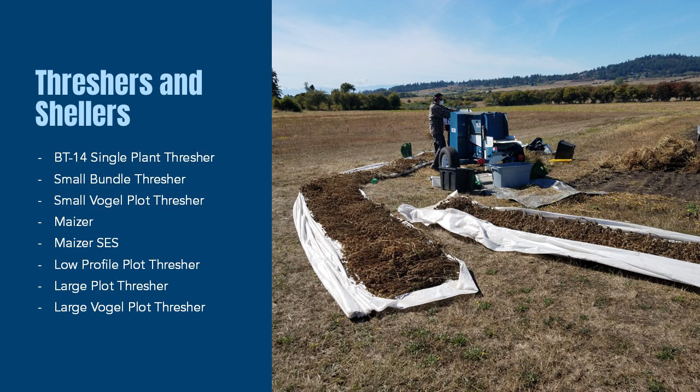And so, like I said, we're going to kind of cover everything at a higher level. There is a fair amount of information to get through, and we want to make sure that we have time for questions at the end. And so what you see on the screen is just a list of all of the threshers and shellers that we offer at ALMACO. We'll go through each one individually, we'll give some information on each one, and do encourage questions at the end. That's what we're here for.

So the first one we're going to start out with is the belt thresher, what we call the BT14. This particular thresher is designed for basically podded plants, some cereal grains. You think of podded plants like soybeans, edible beans. We have a lot of people using them in wheat and also hemp. So some of the characteristics of this machine is that it was originally designed for soybean breeding work. And so by using two belts, it's very gentle on the seed as it's threshed.

We have several combinations of belts to basically optimize the threshing of the machine. It's very easy to feed, and there's literally no carryover from plant to plant, or if you have a small bundle of plants that you're running through it. So as I mentioned before, we use this machine a lot with soybeans, edible beans, wheat, small grains, peas, millet, and probably the most common machine we sell for like hemp breeding purposes.

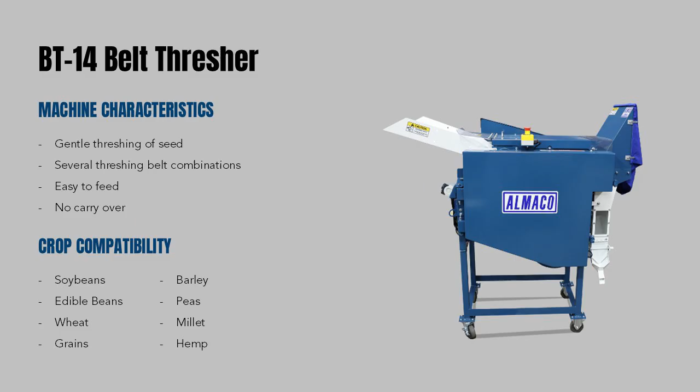The machine itself, you can get with your choice of an electric 3/4 horsepower motor that's either in 110, 220, or for overseas 220, 50 hertz. It also comes with your choice, or you could get it with a 3.5 horse gas engine. The stand types available are going to be a stationary stand or a stand with casters, which is what's pictured. And then we also have a version where it's on an axle and a wheel truck assembly where you can tow it to the field with like an ATV or a UTV. It's not meant for highway speeds, but it can be towed with a vehicle.

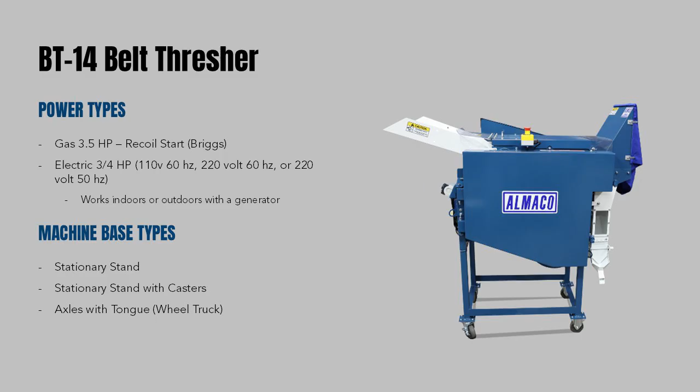For the threshing belts, we have multiple belt styles available, and over the years, we've kind of developed a guide that says, this is what the best combination of belts is for a particular crop. And so you look at like the upper or lower mini cleat lock, that's what we would use in soybeans or edible beans, chevron pattern, smooth, any combination of the belts. And some examples we have listed below. And so the belt combinations required is going to be determined by the crop or crops that you're going to be threshing.

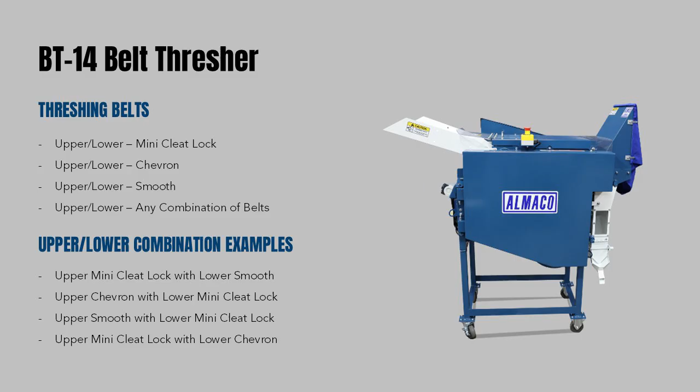So on the cleaning system, basically we use a winnowing blower. You'll find that on pretty much all of our threshers, there is a winnowing blower of some sort to clean the seed after it's threshed. It's easily adjustable. You don't have to open up guards or anything of that nature, so you can adjust it while the machine is running.

And for this particular model, we use what we call a squirrel cage fan, which is similar to what we use on our SPC combines and things of that nature. So the seed, once it's threshed, is gonna go into a seed chute, which in this picture is on the lower right-hand side; it's the white chute with the plexiglass window for viewing. There's a light in there, so you can see what's inside of it without having to open up the back and look. And it also comes standard with what's called the seed chute extension, or the envelope extension.

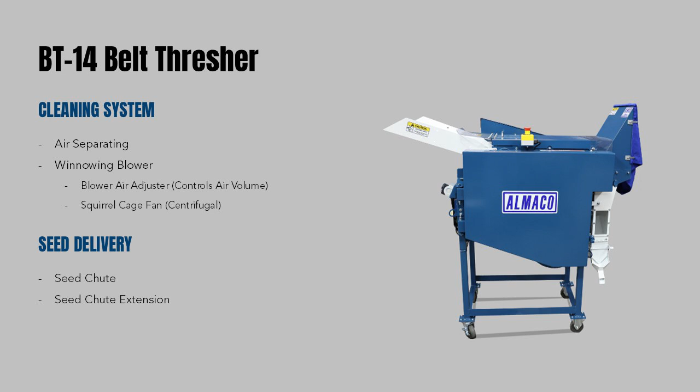So the belt thresher is one of those that can be used in a shop or a lab, or you can take it to the field. One thing to note if you're going to be outside with it, whether in the field or outside of a shop, and it holds true for all threshers, is you want to make sure that the prevailing wind direction is the same as the winnowing air, or the exit of the machine is away from the wind.

So in general, you're gonna position the machine on level ground, and start it with the push button or with the pull rope on the gas engine, depending on what you have. You'll feed the crop into the feed chute and the belts will take the material from that feed chute and thresh it. In the beginning is when you wanna adjust your winnowing air so that you're not blowing seed out the back, and you're also getting a clean sample. Belt clearance can be adjusted at that time too.

We do have recommendations for distances and clearances in the manuals, but it's always best to run a couple test plants through, and then, once everything is threshed for that particular plot, you would collect the sample out of the seed chute.

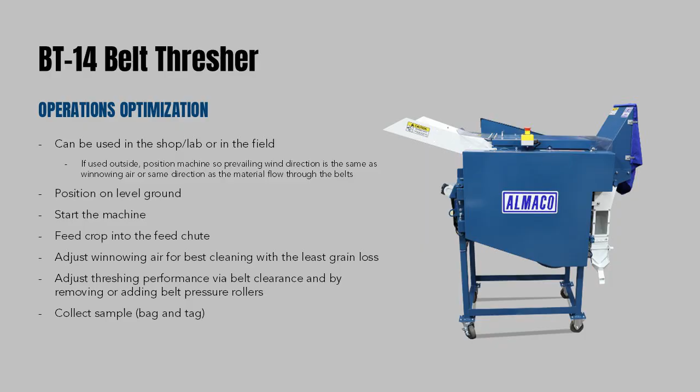So we're gonna move on to the small bundle thresher, or what we call the SBT. This particular machine uses an overshot style cylinder and concave. It's very easy to inspect for clean out. There's no carryover; there's no way for anything to hang up on the inside of the machine. It's got a large opening on the top, which is where the material gets fed in. And there are 5 different styles of threshing cylinder and concaves that are all fully interchangeable.

So if you're using the machine for multi-crops, say soybeans and sorghum, and then maybe you've got some wheat samples where you would require a different cylinder, it really is easy to change. It takes about 15 minutes roughly to swap them out between cylinders.

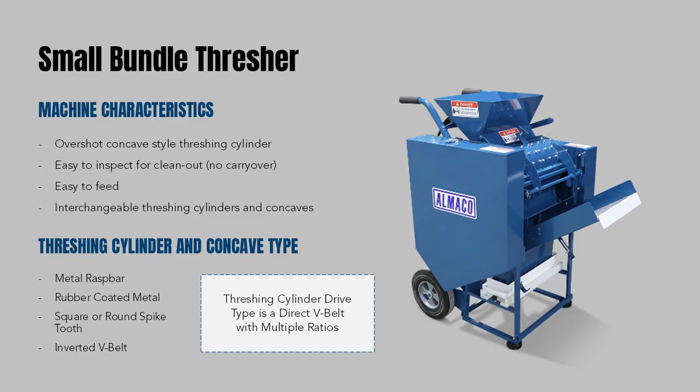With this particular model, you can get it with roughly 4 different power types: a Honda gas engine that's 4 horsepower, a 3.5 horsepower Briggs & Stratton, or electric in 110 or 220, either 50 or 60 hertz.

One of the things about our smaller threshers, like this SBT or even the BT14, is that if you had the electric motor on it and wanted to take it to the field, you could easily put it on a trailer and run it off of a generator, which gives you a little more flexibility. So you can run them outside in the field in the summer or fall, and then indoors in the winter.

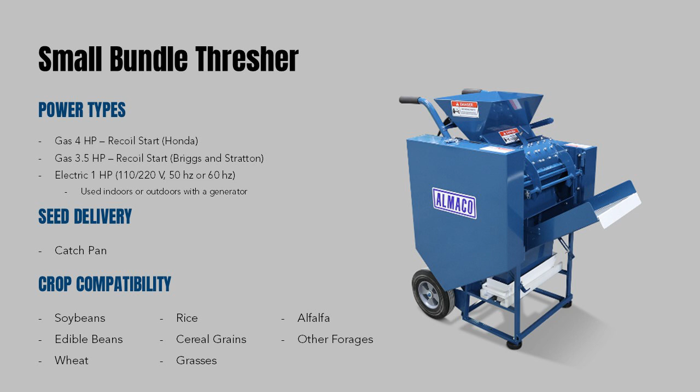Pretty basic as far as the seed delivery goes. It just has a seed catch pan. And you can pretty much thresh any crop that's out there, minus corn. The threshing cylinder combination is going to be determined by what crop or crops.

So the cleaning system is pretty straightforward. As you feed the material in, the threshing cylinder is gonna thresh the seed out of the pods or off the heads. There's a little small straw puller that's gonna pull the seed and some of the chaff material through, and then it's gonna fall through an airstream, a winnowing blower. You'll hear the word winnowing blower a lot because we use it on pretty much every machine for that style of seed cleaning.

You can fully control the amount of air that the seed falls through. This one, as far as the blower fan itself, is something that we manufacture. It's not a squirrel cage like on the belt thresher. You can change the direction that the air hits the recleaning pan, which is what's called the winnowing pan. And then each machine comes with four different, what we call recleaning screens.

So if you have seed that gets kind of blown out towards the back and it falls on the screen, that way it'll fall through that particular hole size, whichever hole size you have in at the time. And then that seed gets pushed back down into the seed collection pan. We also have on this particular model what we call the screen adjuster, where the airflow is going through the seed stream. It's actually a screen that keeps foreign material from getting back into the blower, which makes it so that you have a clean, even airstream.

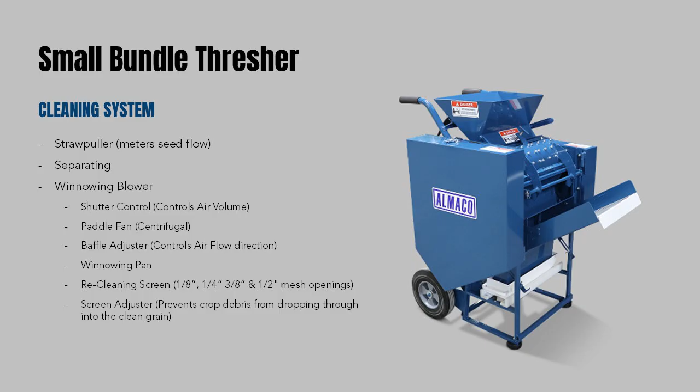For this one on the operation, again, you can use it in shop or lab or in the field. You want to make sure it's level. Same with the wind direction. You want the winnowing blower blowing in the opposite direction, or same as the wind direction. When you start the machine, the drives are going to engage, and you're going to feed the crop into the cylinder.

Now, one thing about this particular machine is that when you're feeding your plant material in, you're not going to let the whole stem and everything go all the way through the machine. You put the plant material in with the heads, you let the threshing cylinder pull the pods and the seed off, and then you pull the stems back out. And so it's something that's different because of the size of it. You really can't have all that stem material going through it. It'll just clog the machine up.

And again, at this point, you'd want to adjust your winnowing air so that you're getting a nice clean sample, but yet you're not blowing seed out the back. And then for collecting the sample, the seed tray basically just slides out and then you can dump it into a bag or a bucket or whatever your preferred method is.

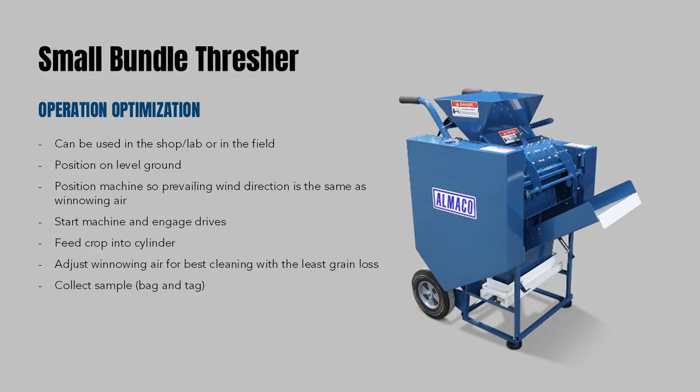So the next one is another small thresher. It's called the small Vogel plot thresher, which we call the SVPT. This particular model is really meant for single heads or a single plant. We have a lot of customers that use this in single plant cereal grains, and sorghum and some soybeans and edible beans, but it's really pretty small and it does work if you have the pods already, say, bucked off the plant. And it's pretty straightforward.

It's very similar to the SBT. It's just got a small straw puller that's going to pull the material down after it's threshed and help with some separation. This particular thresher you can get as it's pictured on a caster stand, or you can get it on a wooden base with a steerable assembly, which if you think about it, looks like a Radio Flyer wagon base, similar to that.

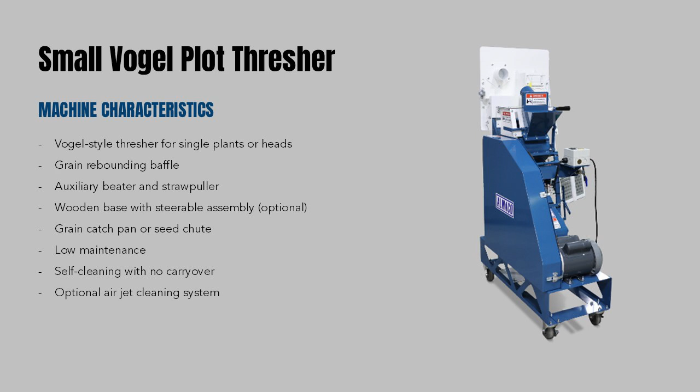This one you can get for grain collection, you can do the catch pan or a seed chute. And the seed chute would then direct seed, say, to an air delivery if it was part of a seed processing line. This one, like pretty much all of our machines, is self-cleaning with no carryover. And it also has an optional air jet cleaning system, where the air jets are built into both sides of the threshing cylinder, the straw puller area, and down towards the winnowing fan. And that's for clean out. You hook an air hose to it to automatically clean the inside of the machine at the end of each sample.

So with this one, the motor options are very similar. You can get the 110 or 220 volt electric, or you can get it with a gas engine, but that's only available on the wheel truck version. So if you wanted that, you'd have to have the Radio Flyer wagon wheel assembly version of it.

So with this one, we have the same style and type of concaves that we do for the small bundle thresher. I will note that even though they're the same style and type, they don't interchange with the small bundle thresher, because that one's a 12 or 13-inch wide cylinder and this one's only 6. So it's just the same style and a smaller version. And the crop compatibility is going to be the same as the small bundle thresher: cereal grains, beans, grasses, pretty much anything small that's single plant, single head.

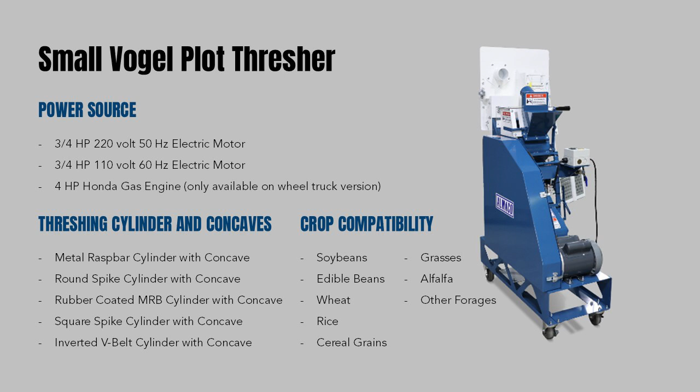For this particular model, it's gonna be very, very similar to the small bundle thresher. You can use it in the shop or lab or in the field. You wanna make sure it's level. Position it with the wind direction, the same as the winnowing air. Again, you're gonna start the machine, engage the drives, and then when you feed this crop into the cylinder, it's gonna be the same, where you just feed the heads down into it and then pull the stems back out.

Now, what I have seen in the past with some customers, instead of using the stem, say like you leave 12 inches of stem on some wheat heads, I've had customers where they just clip the wheat heads off and just run the heads through it in general. That way you don't have to worry about it. But sometimes it doesn't thresh as nice if you don't have a stem on it. So I always recommend to leave at least a foot worth of stem below the heads. That way you have something to hang on to, and it keeps your hands away from the threshing cylinder and concave.

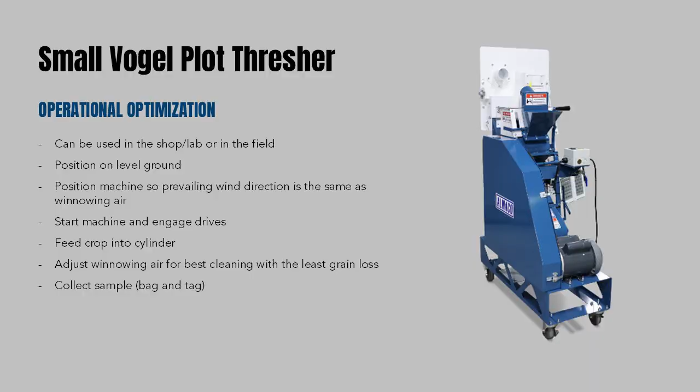Okay, so we're gonna move on to the large towable threshers that ALMACO has available. The first one is what we call the large plot thresher, or the LPT. This is gonna be a large, or high volume thresher. You're gonna have a little platform to stand on, so you're gonna be up off the ground, but it's that way for a reason, so you can feed more material through it.

The concaves and threshing cylinders on this particular machine are interchangeable as well. And one thing to note is that we use a torsion axle, and you can tow this at full highway speeds, and you don't even really know it's behind you. At 70 or 75 miles an hour, it pulls really nice.

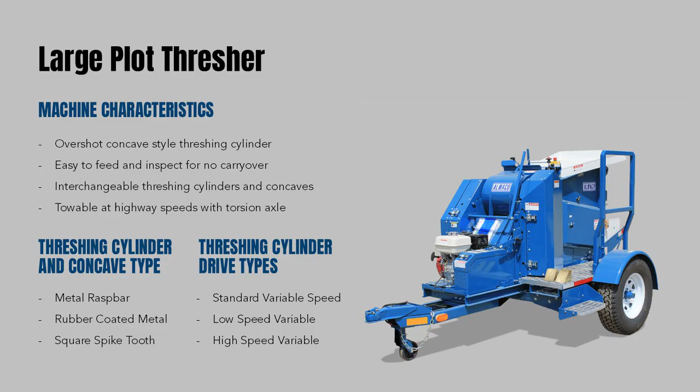So this particular model, you can get it with an 8 horse Honda gas engine with electric start, a 5 horse electric, 220 volt, either 50 or 60 hertz, or a diesel, which is a 9 horse Hatz with electric start. And we do have the option to do dual powered with diesel and electric. So if you are going to be using the machine several months out of the year, part of it in the field, part of it in the shop, you have that ability. And this machine is pretty much compatible with all crops, as listed. Basically everything except for corn.

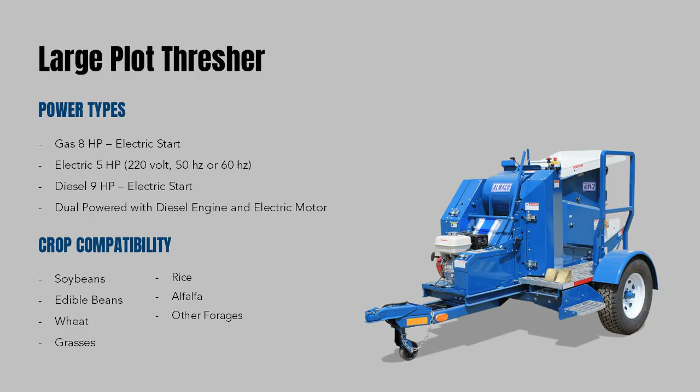So as far as the cleaning systems, the way the machine works is once the material is in, in this case you throw the whole bundle of material through the machine, it gets threshed off. There's a straw puller that kind of helps pull the material through the threshing cylinder. And then it falls onto a shaker pan, and then the seed at that point is separated from the chaff.

And then as it's being shaken out the back, the seed falls through that airstream, the winnowing blower, which is basically, you have three different ways of adjusting that air. One is the amount of volume going through it that the seed falls through. You can deflect the air onto the windage tray to help with even further cleaning. And at that point, the adjustable windage tray in the back is another option to just give that final seed clean.

The machine itself uses a single Graepel style sieve, and as you can see on the screen, we have multiple sizes available. And the sieve that would be required is all going to be determined by what crop or crops you're going to be threshing with it.

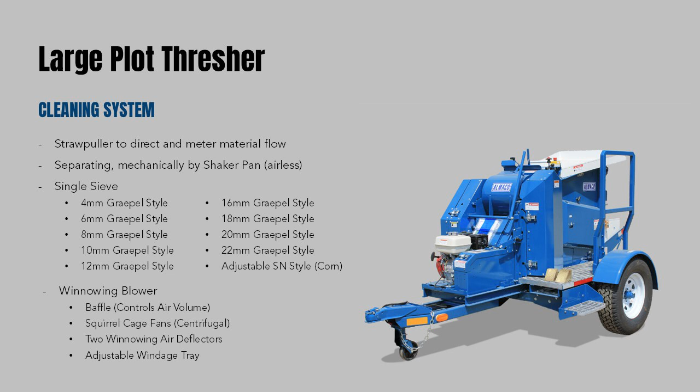So for seed delivery, the standard is going to be a seed chute where you would just put some sort of collection bucket, some sort of seed catch bucket, either something that we make, or a 5 gallon bucket or 2 gallon bucket, whatever you want to catch it in, or a tray.

We do have an optional, what we call the air delivery system, which basically has a cyclone blower on it. As the seed is cleaned and it falls into what would be the seed chute, now it falls into an air delivery tube, and the cyclone would be positioned right by the operator station. So the operator could, in theory, feed everything into the threshing cylinder and then collect the sample without getting off of the machine.

So some other common options that we have on it, I mentioned the seed catch bucket. We also can include an air compressor that's on board. It's belt driven and it has a tank and a hose. So if we're doing a lot of threshing out in the field, in between certain plots, you could use that air compressor to blow the machine out, clean it out, during your inspection.

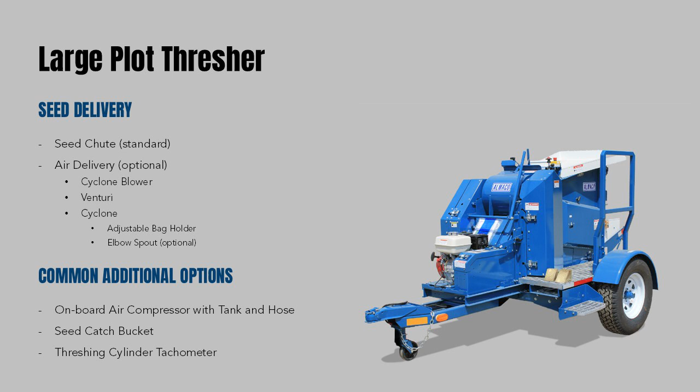And then we also have a threshing cylinder tachometer option, which if you're doing multiple crops, it really is beneficial, so that if you're threshing soybeans, you gotta be at, say, somewhere around 400 RPMs, but if you're threshing wheat, you gotta be at 1200. So it's just the easy way to know how fast the cylinder's turning.

So for the operation of this particular machine, you're gonna tow to the field. It's best to uncouple it from the tow vehicle, because you will potentially have to make adjustments. You may not be level. And the key with this machine is making sure that it's level when you're in the field. Same with the other machines, make sure that the prevailing wind direction is going the same direction as the winnowing air. And then you use the jack to level it.

And you may also use that jack to help control the time that the crop is on the sieve. So if it's on there too long, and it's just not coming out, then you'd raise it up a little bit. If your material's coming out too fast and you got a lot of seeds coming out the back, then you'd lower it a little bit. It's just some fine adjustment.

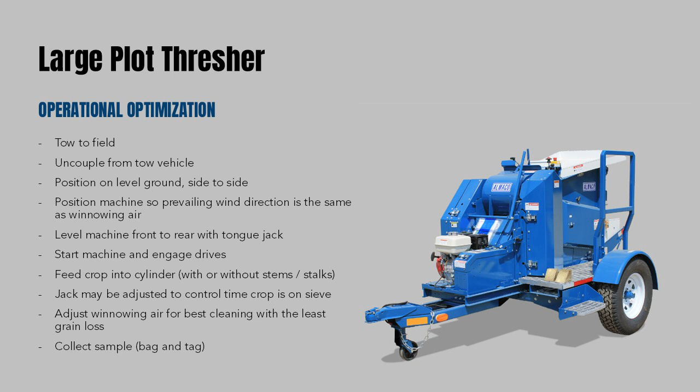And at this point, once you have it all leveled, then you're gonna start the machine, which will engage the drives. You can feed the crop into that cylinder with or without the stems. I would say that 99% of people are just throwing a big bundle of material in it and letting the machine do the work. That's what it's designed for. And again, the first couple samples you run through is when you'd want to adjust your winnowing air for the best cleaning.

So the next one we're going to talk about is the low profile plot thresher, or what we call the LPR. This is another large volume machine, but it has a lower feeding height compared to the others.

So the main differences between the LPR and, say, the LPT is that this particular model has what we call a conventional threshing cylinder and concaves. So it's an underslung concave, very similar to a commercial combine. It's the same style, and basically you adjust the concave with a lever, just like you would on a combine. And so it also has a lower feeding height with no operator platform required, and that's a big thing, I would say, for somebody like myself.

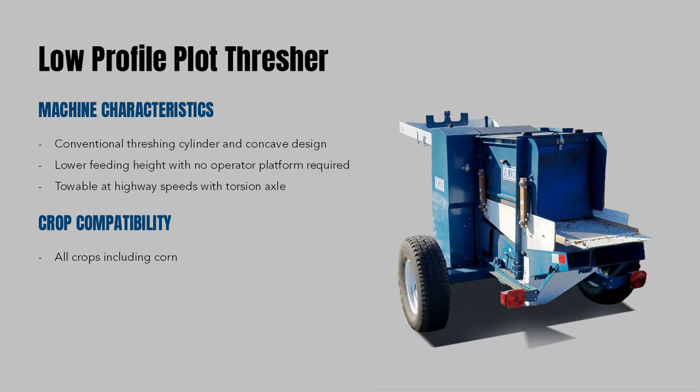The feeding height is less than 5 foot, and I'm all of 5'4", and I have no problem reaching the feed area safely. This one is towable at highway speeds as well. And for this one, the crop compatibility is all crops, including corn. And so this is probably the most versatile large plot thresher we have, because it can be used for everything.

For the power types, you can get the 8 horsepower Honda gas engine, 5 horse electric 220, or a diesel that's 9 horsepower. And again, the difference between this and the LPT is that on the dual power, you can get it with diesel or gas and electric. And so there's one of the differences there.

To feed the material, the standard is going to be the feed pan, where you just manually feed material into the machine. The threshing cylinder will take it and do the work. And then we do have a belt feed option, which is a small conveyor that feeds material in the machine. You have to feed the material to the conveyor, but once it's in that little conveyor, the machine does the rest. You don't have to worry about helping it feed through. You don't have to have your hands down by the threshing cylinder and things of that nature. So we sell a handful of those a year with the belt feed option.

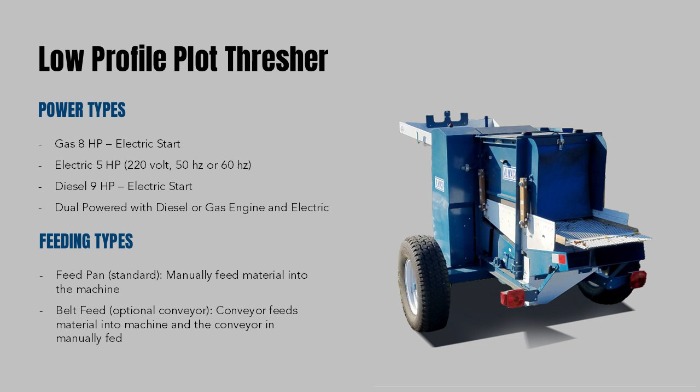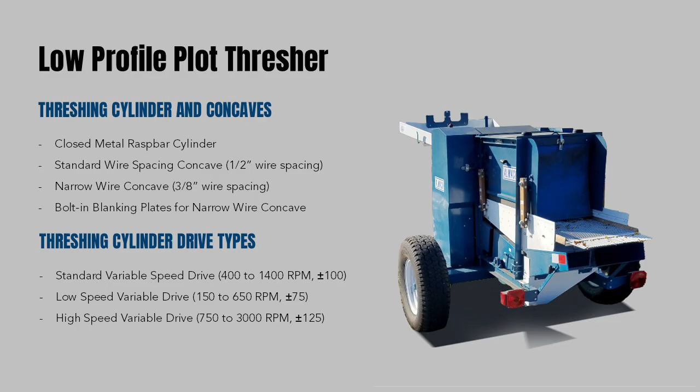So on this particular machine, we only have one style of threshing cylinder, and it's going to be a fully enclosed metal rasp bar cylinder. There are two different options for the concave. The standard wire spacing is going to be 1/2 inch between wires, which is what I would say if you're doing row crops, so corn, soybeans, edible beans, you would need the larger wire spacing. The narrow wire would be more for if you're using it for cereal grains or grasses. And then we also have some bolt-in blanking plates that help with threshing on the narrow wire concaves. This machine will have the same style of threshing cylinder drive types, where you have the standard, a low speed, and a high speed.

For the cleaning system, it's going to be very similar to the LPT, where it has the straw puller, and that's basically going to direct and meter the material flow into the machine. We're still separating it with a shaker pan. And the winnowing blower is being controlled exactly the same as the LPT, where we have the baffle control, and we use a squirrel cage fan, and we also use a single sieve on this machine. And there are a lot of components that are, what I would say, interchangeable between the two. So if you had a location that maybe had an LPR and one location had an LPT, or you had one of each at the same location, you could buy multiple sieves and they would work in both machines.

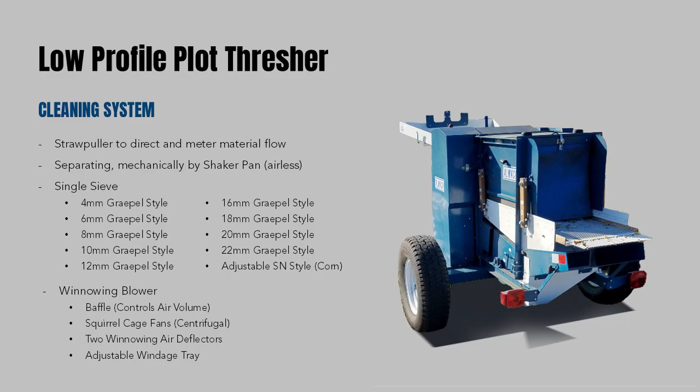And this is gonna have the same seed delivery types as the other machine we looked at. The seed chute is the standard. The air delivery is an option. This time, instead of being up on the platform, it's gonna be accessible from the ground. It's at about waist height where the envelope holder is, or the bag holder.

And the options are gonna be very, very similar with the LPR, where you can have your option to get an air compressor, the catch bucket, the cylinder tack, special feed pan guarding. And we have new options now within the last 6 months for interlock guard switches, and an e-stop on the cylinder with a brake.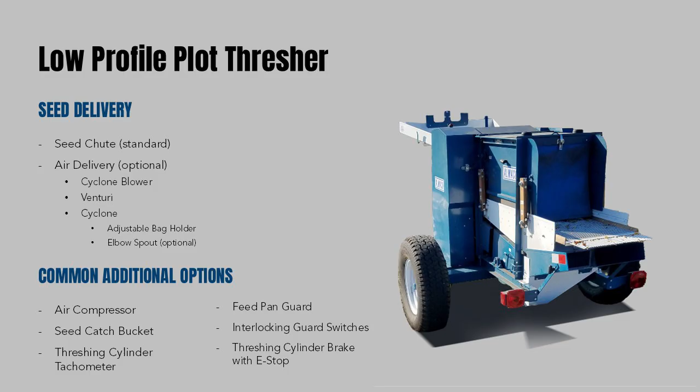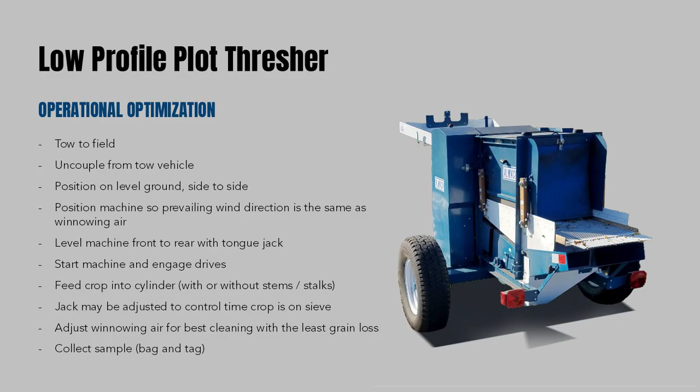So the operation in the field is gonna be very, very similar, or exactly the same really, as the LPT. Once you get to the field, you get it unhooked and get it leveled, and then you can physically start using the machine.

So the last large thresher that we have available is going to be what we call the large Vogel plot thresher, which we call the LVPT. This particular machine is going to use an overshot style concave and threshing cylinder. It's going to be real easy to feed. There is no way for carryover on the inside. It's all completely smooth. And again, it's towable at highway speeds.

The threshing cylinder types for this particular model are going to be a rubber rasp bar cylinder and concave, and then we have a forged spike tooth cylinder, and then that same cylinder with an e-stop brake. This machine, I would say, is the most common machine that is sold for all cereal grains and rice. We have some people using them in soybeans and stuff, but I would say 99% of our customers are using this machine when it comes to cereal grains.

It was based off the original Vogel design that came out of Washington State in the 60s. And so we've obviously improved it over the years. And at the current time, ALMACO is the only company that builds this machine anymore. We're the only one that can provide it, I guess.

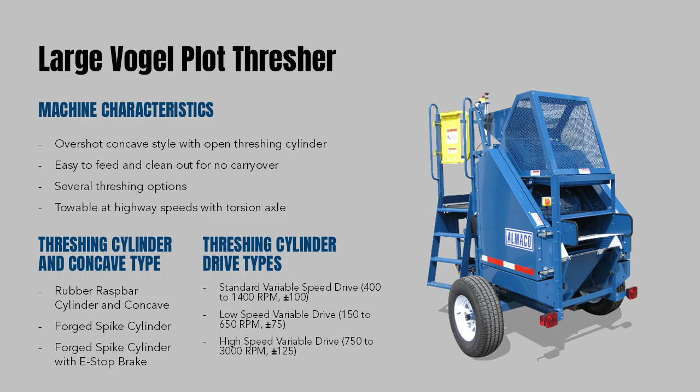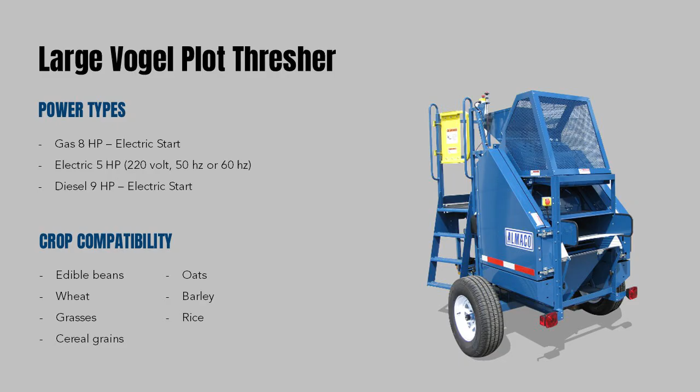So this one for the cleaning system, it basically just has the straw puller. Once it comes out of the cylinder, it's just a large straw puller that pulls everything down onto the shaker pan. But this one has a little bit different style of winnowing blower, where it's a paddle version that we make. And so the air adjustment is going to be the same, where you have an intake air shutter, and that's going to basically regulate how much airflow is coming out the back. And then we use a deflector to change the angle of the air for cleaning, along with the windage pan in the back to help with that additional fine tuning.

Right now for seed delivery, the seed chute is the only option we have for it. So there's no air delivery. If somebody wanted an air delivery, we could probably put one on it, but it would take some engineering resources and things of that nature, but it could be done. And then the additional options again are the threshing cylinder tach, the seed catch bucket, and an onboard air compressor.

So this is going to be pretty much the same as the other ones, where we're going to get it to the field, get it uncoupled, get it leveled, start the machine, which is going to engage the drives, and feed that crop into the cylinder. And this one really likes it when you feed a big bundle of wheat. It works best. The more material you have, the better it threshes.

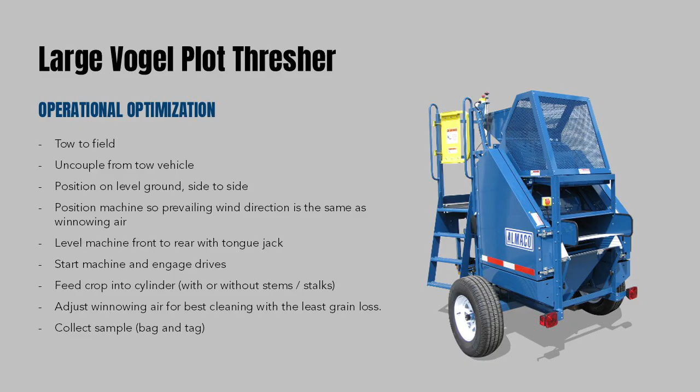And one thing I would like to note as part of the operation on this is if you notice in the picture, this machine actually has two e-stops on it. And that's mainly because you're going to have one person on that platform and then one person down below catching the seed. And so we make it so that if there's an issue, either the person on the platform or the person on the ground can stop that machine instantly.

Okay, so from here, we're gonna move on to the Maizer, which is our newest, I shouldn't say newest, I guess it was put out in like 2007, but it seems new to me. The Maizer, which is a whole ear corn sheller, you can use it in small batches or large bulk material. So again, you can do it in small batches of 10 to 15 ears, or we have some customers that use an in-feed conveyor and they just dump bags of ear corn, say 50-pound bags or 50 ears at a time.

This particular model uses two belts to shell the corn off the cob. It's very gentle on the seed. And the top belt is fully adjustable. So if you have different ear sizes, you're able to adjust that belt to accommodate that.

There's really nowhere for seed to get hung up. So when you're working with transgenic, it's nice and easy to clean out. We have protective shielding on it for the operator's safety, but there's also plexiglass windows for viewing so you can see the material go through it. You can see the cobs rolling through, the seed getting shelled, and then there's also viewing windows for the cob discharge and for where the seed comes out.

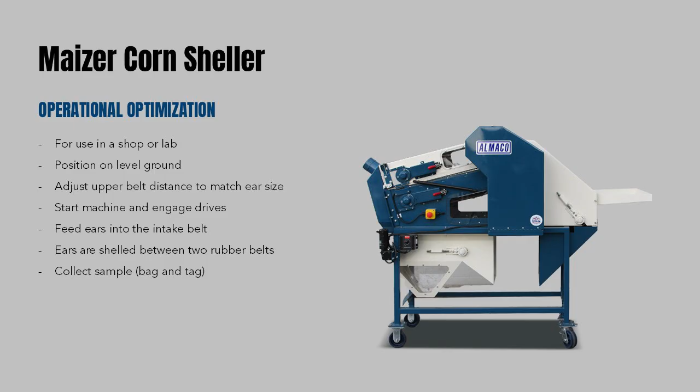So the next one is the Maizer SES, and this is just a single ear corn sheller. It's really meant for very small batches, if you had, say, 5 to 10 ears of maybe an inbred or something like that. One ear, depending on the size and how small the kernels are, is anywhere from 2 to 5 seconds per ear.

Some of the different features of this particular model: we have a cob separation door, so there's no way for the corn, once it's shelled, to exit with the cob. It comes out completely separate. The handle on it is what we call a mechanical advantage, and it reduces the force required to shell. You put very little pressure on it, and the four rollers do all the work. We use four rubber rollers for this. They're easily accessible, and they're replaceable if needed.

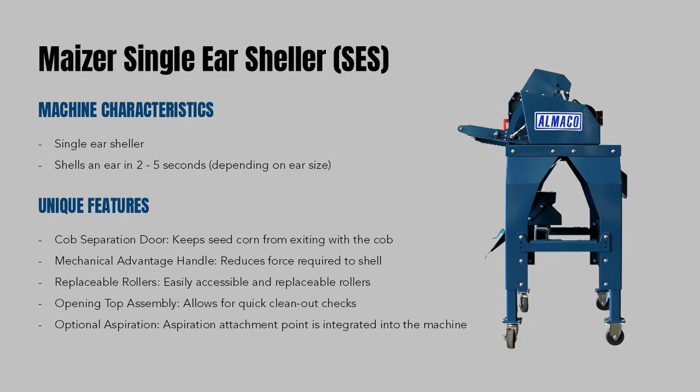For inspection, there's a top assembly that you can look through the window and see it working. There's also a quick latch on the cover if you need to get in for clean out or something of that nature. And every machine comes with the aspiration attachment so that you can hook it up to a small dust collector if needed.

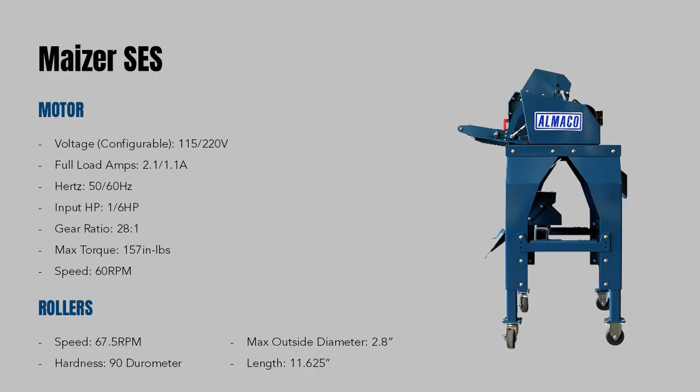This particular model comes in electric only. I won't go through all of the full specs on it, but it's just 115 or 220, 50 or 60 hertz. And you have some idea of the dimensions of the rollers and the size. It takes up a very small footprint in general.

So for this one, you're going to turn the machine on, and there's a little feed slot. You can see the handles on the left side of this picture. Above that is a feed slot, where you would put the ear corn in. You lift the handle to let it fall into the threshing chamber. And then as you lower the handle back down, you put a little pressure on it, and that's what starts the threshing or shelling of the kernels.

Once the kernels are shelled off the cob, they're gonna come out a separate chute, which is gonna go to the envelope holder. And then the cob is gonna come out the back of the machine into some sort of trash can or something that you choose to put behind it. At that point, you just rinse and repeat, so to speak. You just keep doing it until you're done and then just hit the off when you're ready to be completed.

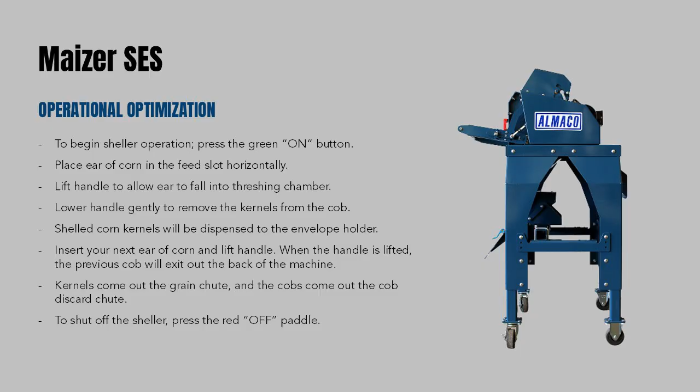So as we move forward here, there's some common accessories and options that we can upgrade or you can include. Some of the optional accessories are the air blast seed cleaner. We have a seed transfer stand, which works with all of our threshers. We have a waste cart that also works with all of our threshers. And then we have what we call the portable seed lab with a D1 data collection on it.

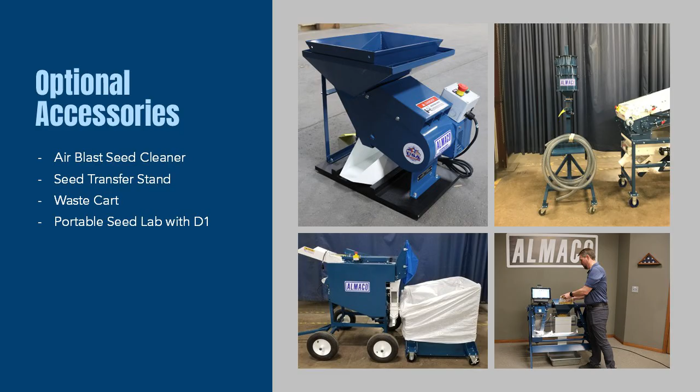So if there's times that you're using these threshers in a shop or lab and you want to take a weight, test weight or moisture, or take data off of it, that was the idea behind the portable seed lab, is that you wouldn't have to have a full-blown combine to do the work. You can do it with a thresher and then take your data right there in the lab with it.

So, seed processing systems. We're not going to spend a lot of time on this particular one because we've already done a seed processing webinar about a year ago. But the idea is we want to show how our machines are versatile. They're interchangeable. You can use them as standalones, or you can integrate them into a processing line.

We have some folks that'll say, well, I don't need a full line. I just want to shell my corn and I want to send it from there to a Seedboss. I need to grade it and then I'm just going to package it at that point. Or you could do something as similar as a full automatic processing line.

Like with the belt threshers, I would say probably the most common thing we do with the belt threshers is what we call the threshing plenum, where you have a conveyor with anywhere from 3 to 6 belt threshers attached to it. And you can use all of them at the same time. And then that conveyor takes all the waste into a grinder. So there's lots of different options, and really it's meant to just show how interchangeable and versatile these machines are.

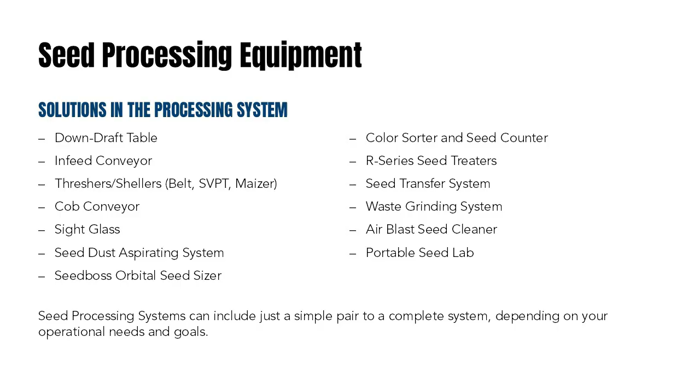Okay, so some of the things that we do offer as well for all the threshers is the aftermarket services, where we have a dedicated call center here in our facility in Iowa for parts and service troubleshooting if needed. We have a central service facility that takes care of all of our in-house planter, combine, thresher services, whether it's preventative maintenance or just normal general service work or major repairs.

We have a field service team whose whole job is to just drive around the country and go to customer locations and do those same types of services on site. We have capabilities of doing major repairs on site and things as small as just changing the V-belt if needed.

For warranty, all of our machines come with a 2-year warranty, which I think most others in the industry are one, but we provide a 2-year warranty from the date of shipment. And then all of our threshers are built with parts that can be sourced locally, so it's all standard SAE. If you have a V-belt that goes bad, or one of the drive belts, you don't have to call me for a part. You can go to your local NAPA, John Deere, local farm store to get them. There are certain components that would have to come from us, but those are the ones that are machine specific that's ALMACO built.